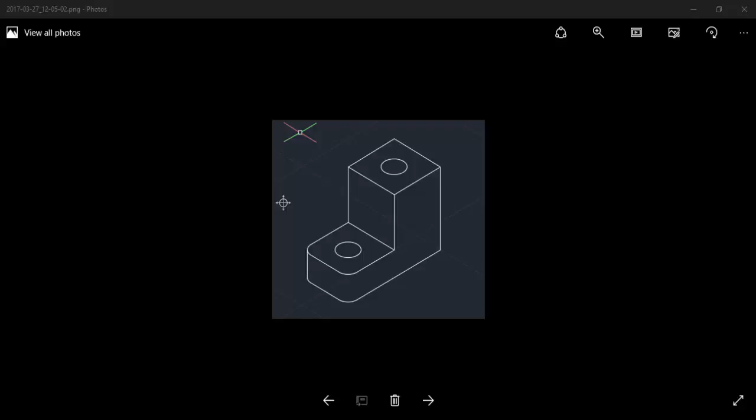Today we're going to be looking at how to create an isometric drawing inside of AutoCAD. Our drawing is going to be like this. We're going to have a look at using the ISO circle, an ellipse tool, and I'll show you how to actually do that.

The first thing you need to do is start a new drawing and choose your template. Once you go into the model view, we are going to put the grid on and change the snap mode to put the snap to isometric snap. If you don't like the grid, you can always use the 2D model space, which will enable dots, but I'm just going to leave the grid.

Now our isoplane tool allows us to get inside the isometric views, and basically to draw an isometric drawing there's three different lines that you need to draw. The first line is going to be a line this way at 30 degrees. You have a line the opposite way at 30 degrees, and then you also have your vertical lines. This is the basis for any isometric drawing, these three lines. From these three lines we can then create our entire shape.

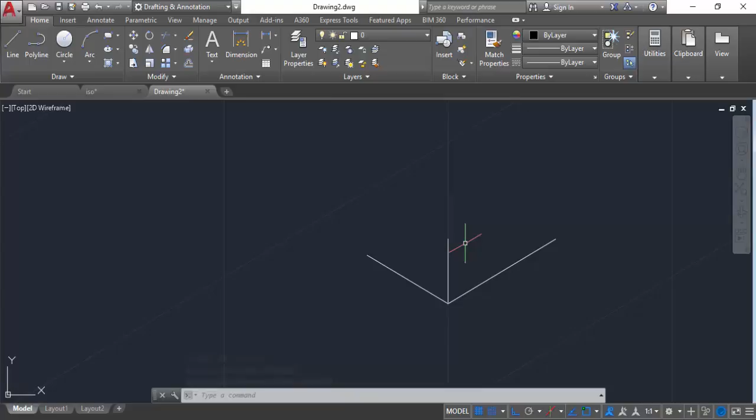So we're going to try and draw our little step block, and we're going to try and have our ellipses or our circles in there as well. The first thing to do is to draw the actual step block. Make sure that ortho mode is on, and make sure that your snap settings, or some of your snap settings, are on depending on what you need. So the first thing to do is just draw our shape.

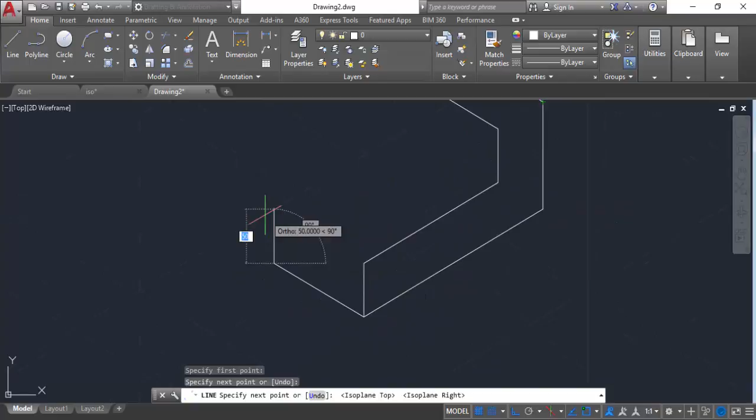The next step on our step block is to actually start to draw the curves and the ISO circles. Now we can do this a few ways. The first way I'm going to show you is just by drawing two ellipses over here. You can do it another way, but I'll just show you how to do it this way.

So what you want to do is write ellipse to get the ellipse tool up, and here are your options for the ellipse tool. We want to use ISO circle. Now depending on which isoplane view you're in is how the circle is going to be drawn out.

So what I'm going to do is find a point and draw out a circle that will go to the edge of that point, and I'm going to repeat that process again. So using the ellipse tool, I find the exact same point on the other side and draw another circle like that.

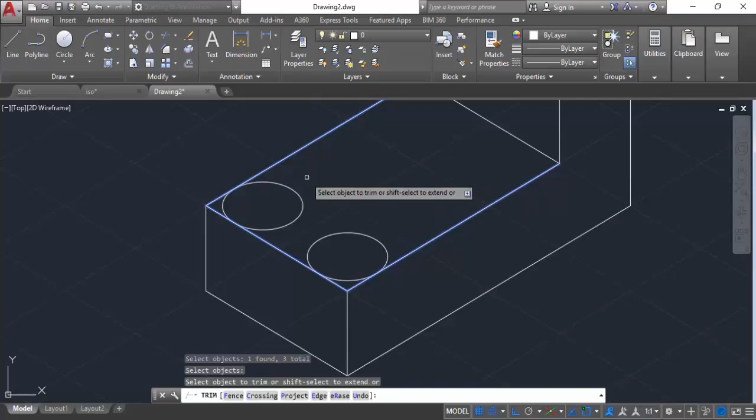Now once you have that, we can start to trim away bits and pieces that we don't need. So you click on trim, and then you can click on your cutting edges. I'm going to click this outline of this shape, and then I'm going to trim away some objects that we don't need. So I'm going to trim away those two objects.

Now to get the rest to trim away, we're going to have to go back into trim, so I can start to trim away the bits and pieces that I don't need. Anything else that you don't need, you can always click on the shape and then press delete if it's not working. So now we've got the curves nicely at the top.

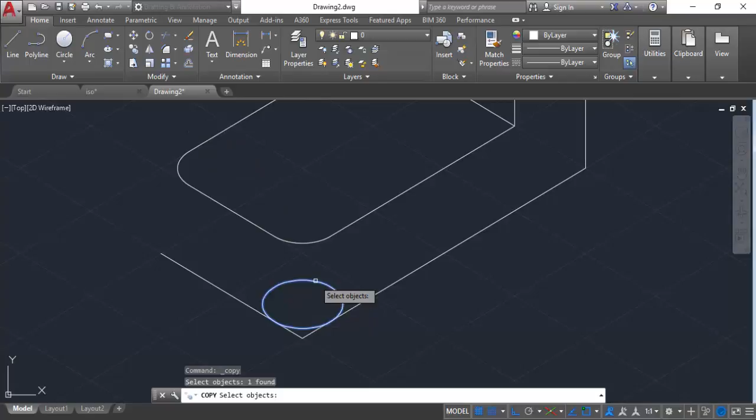What we need to do is repeat the process again down here at the bottom. So I'm going to use the ellipse tool again, find the same point and create the same circle underneath. Now you can always copy that circle, so press the copy command, press enter, and then pick the base point, which is going to be the center, and you can put the circle and just copy it over like that.

So now I'm going to grab the line, click the tangent, and draw it down to the last bit like that.

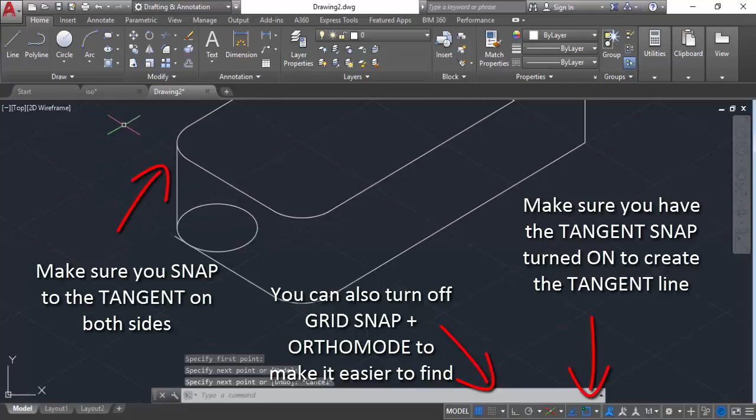So now when I go back, if I click trim, I can delete the bits and pieces that I don't need. So that's the bottom of our shape.

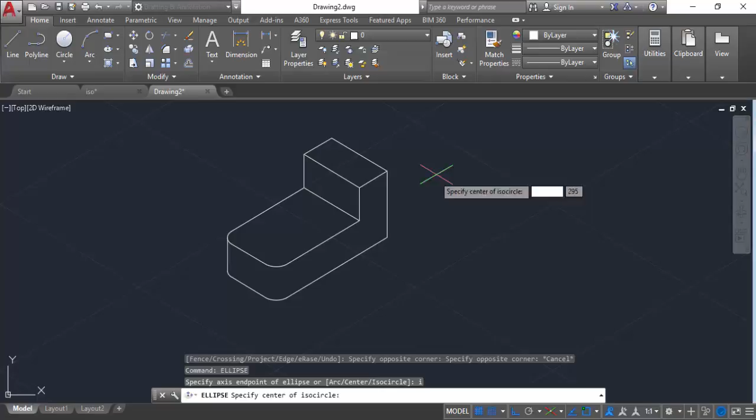We also need to have an ISO circle in here and also up there. So again, same principle: using the ellipse tool, press I for ISO circle, make sure you're in the right plane. Find your point and draw out how big your circle is going to be.

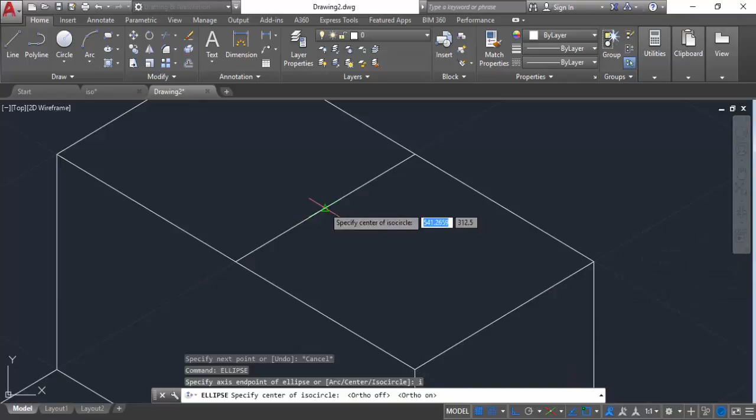Now you want to get it in the middle of this, so what we're going to do is draw a line and then find the midpoint. So you need to make sure that the midpoint section is turned on, and then I can use the midpoint and draw my isocircle like that. Then any line I don't need, I just have to delete it like that. So there's our first isometric drawing in AutoCAD.